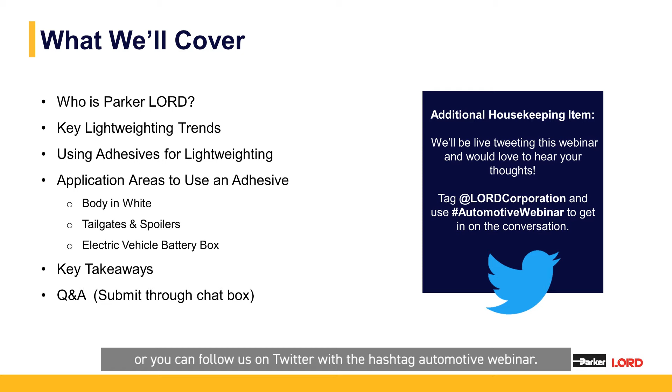Parker is a global company with more than 100 years of history. We started in 1917 from a small office in Cleveland, and now we are serving more than 50 countries around the world with more than 3,000 product lines and very close to 500,000 customers.

Our main target is really to be a collaborative partner that can deliver a solution to meet the specific design with a specific cost target with the continual improvement process. And obviously, we are able to support our customers around the globe in each location. In fact, as EPS division, we have offices, plants and support in the main regions close to our customers, and we can provide the same product with the same quality, with the same performance around the globe.

Let's start looking at the CO2 emission targets around the globe. As we can see, the emission target level is different for each region. But what is equal is the trend. The trend is to reduce it. And it's clear that in 10 years from now, the reduction will be very, very strong. And this is an important target for all of us because it can help us to preserve our future and to work on a more sustainable transportation system.

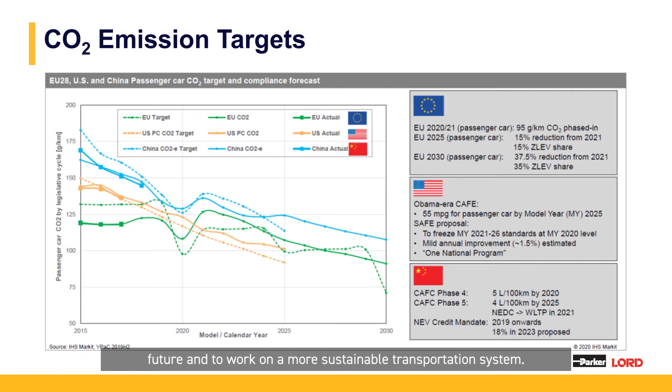If you analyze the situation in more detail, it's evident that lightweighting is one of the key elements that can help CO2 emission reduction. Just for example, for each kilogram that we can save in the car, we can reduce the CO2 emission by 0.08 grams. However, if we consider the weight increase that we can have on EV cars, lightweighting will become more and more important for two main reasons: to improve the fuel economy and to increase the battery autonomy.

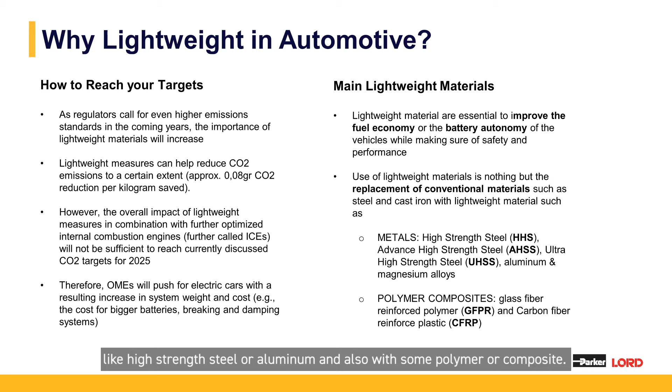And because of that, the adhesive is one of the key elements in this environment. In fact, we will change the standard material with new materials like high strength steel or aluminum, and also with some polymers or composites. And because of that, the adhesive will become one of the key elements.

In fact, if we look in a snapshot at how the trend will be during the next 20 years, we see that the usage of lightweight material will move from 29% to 67%. And we are not talking only about high strength steel or aluminum, but also carbon fiber plastics.

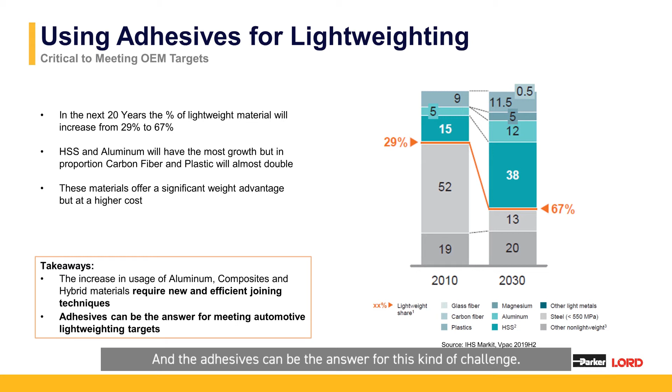And all of that provides new challenges on the market. And the challenge is more related to defining efficient joining techniques, and also providing cost savings in order to compensate for the more expensive material that there is on the market. And the adhesives can be the answer for this kind of challenge.

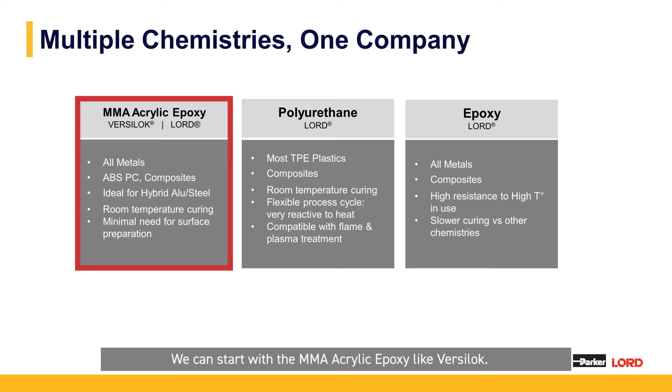Since we are talking about different substrates, we must work with different chemistries, and Parker can provide all of them. We can start with the MMA acrylics epoxy like Versilok, that is very flexible and perfect for hybrid bonding like aluminum steel, with a great room temperature curing profile.

Or we can work with polyurethane adhesive that is very optimized for composite material and with strong compatibility with flame plasma treatment. Or we can talk about epoxy material that is perfect when we want to work in high temperature environments and more strong or severe

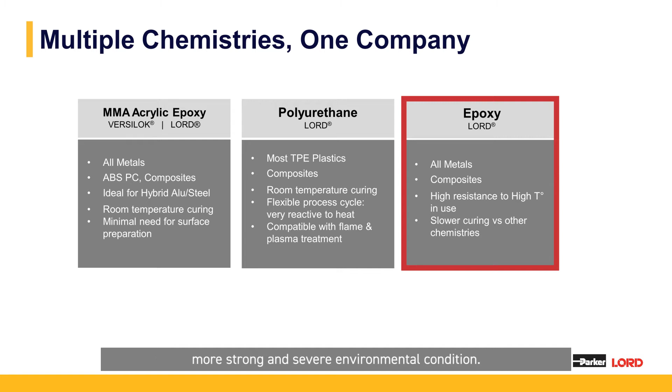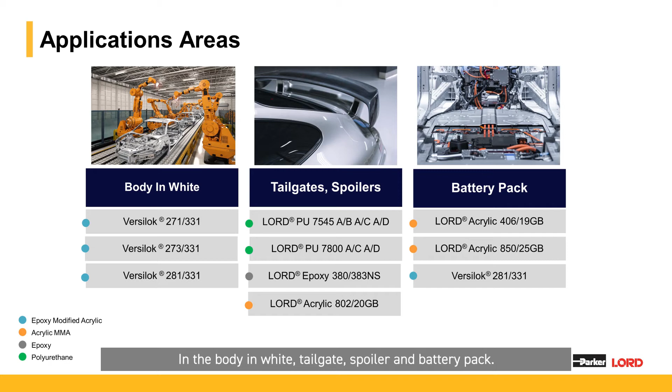environmental conditions. In terms of application, we would like to share with you some specific cases that we have analyzed in the body in white, tailgate spoiler and battery pack.

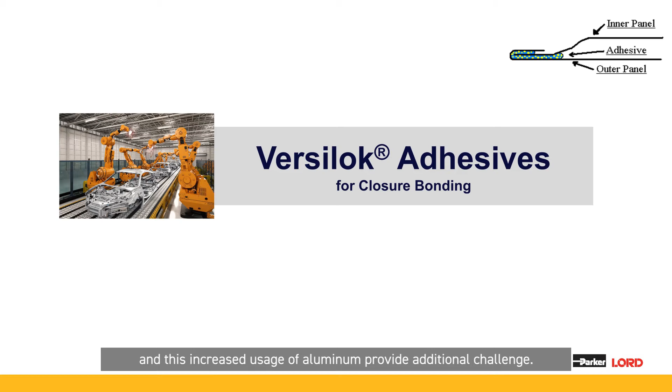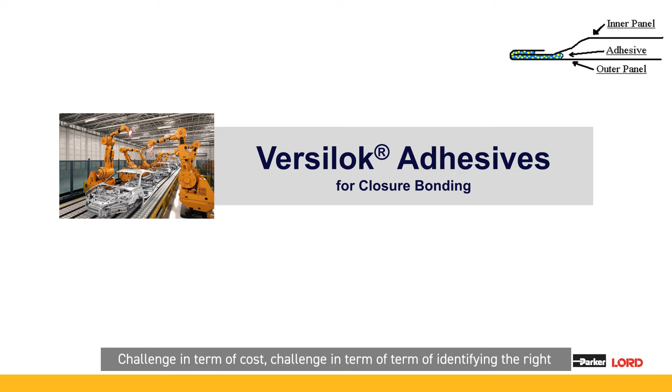Let's start with the closure and the specific hem adhesive that is used in this application. Here we have noted that the usage of aluminum is increasing day by day, and this increased usage of aluminum provides additional challenges: challenges in terms of cost and in terms of identifying the right quality of the surface of the hood, the lift gate or the door. Versilok adhesive is one of the right answers to all of these challenges.

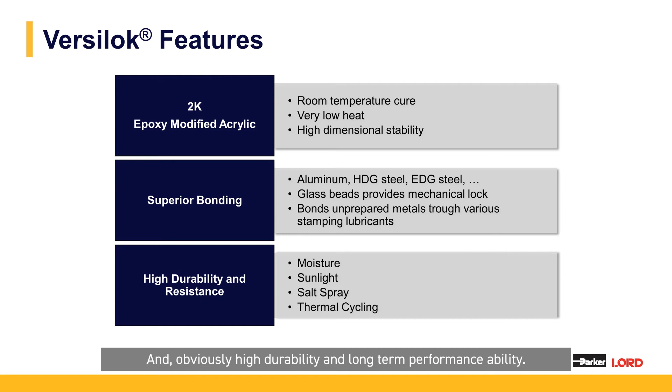Versilok is a 2K adhesive, an epoxy-modified acrylic that has a specific room temperature curing profile that provides the right dimensional stability, together with high performance in terms of bonding on all the substrates available, including the stamping lubricants that are possible to use in the market. And obviously with high durability and long-term performance stability. If we go into more specific characteristics of Versilok, my colleague Jeff can speak in more detail on that.

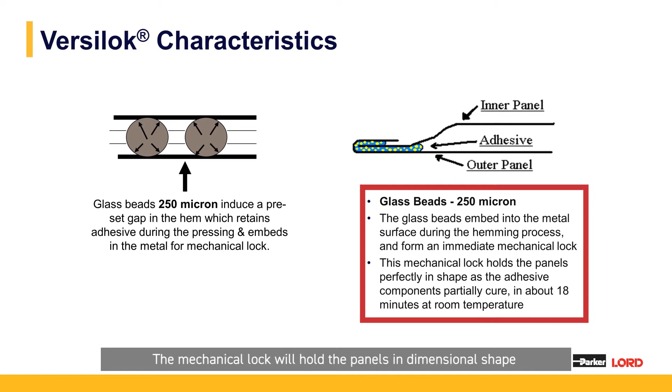Thank you, Matteo. The main Versilok characteristic incorporated within the adhesive itself is the 1/4 millimeter diameter glass beads that help reduce movement of the panels when they are finished hemming. The glass beads are able to be embedded into the metal surface and form an immediate mechanical lock. The mechanical lock will hold the panels in dimensional shape, and you have approximately 18 minutes to accomplish this.

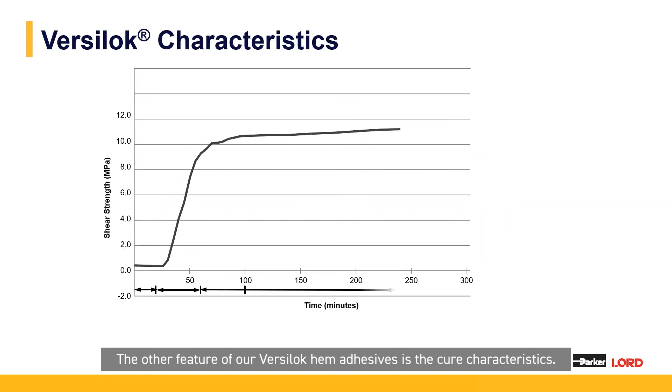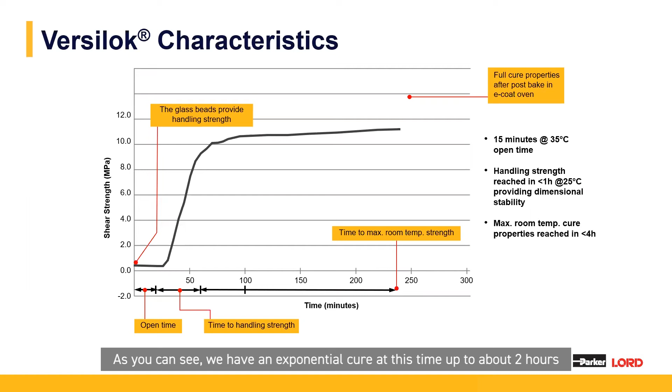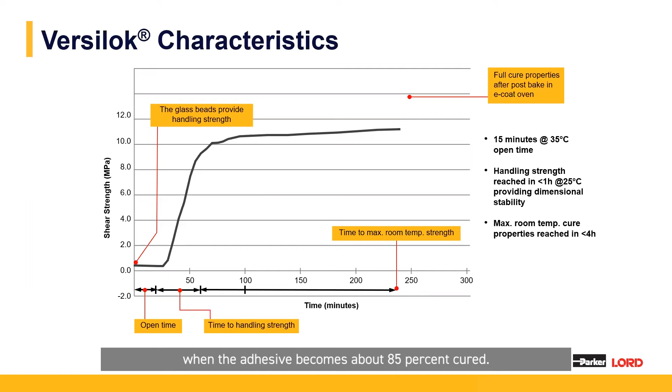The other feature of our Versilok hem adhesives is the cure characteristics. As you can see on this slide, we have adequate open time of approximately 15 minutes at room temperature, and approximately 60 minutes handling strength time. As you can see, we have an exponential cure up to about 2 hours, when the adhesive becomes about 85% cured. After that, it's able to go into the E-coat oven.

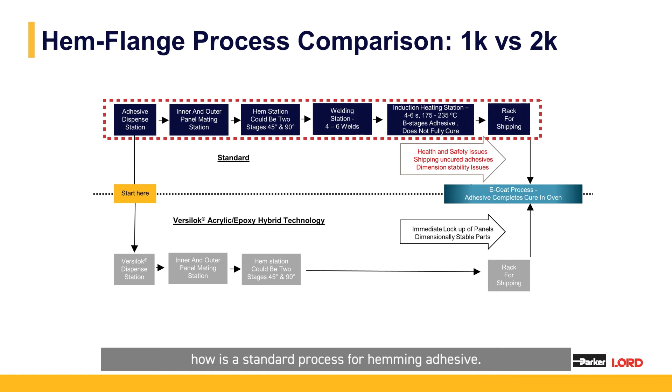Yes, thanks, Jeff, for this introduction on the key technical characteristics of Versilok. All of these characteristics can help us optimize the hem adhesive process. Looking at the top part of the slide, in a standard hemming adhesive process we have the dispensing station, the marriage of the inner and outer part, the hemming station, then the welding and the heating station. Both stations are needed to lock the dimension and provide the right stability of the part. After that, the hood, the door or the lift gate is ready to be shipped or put on the rack.

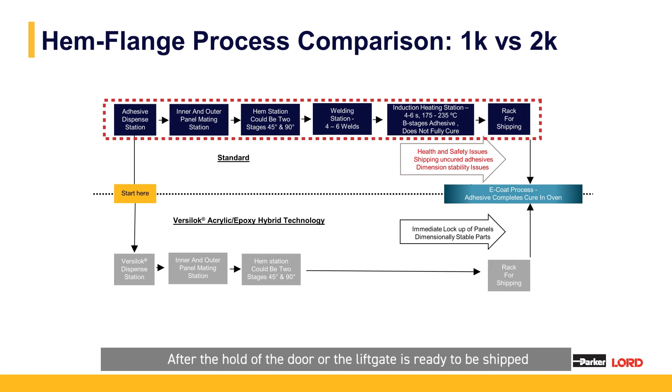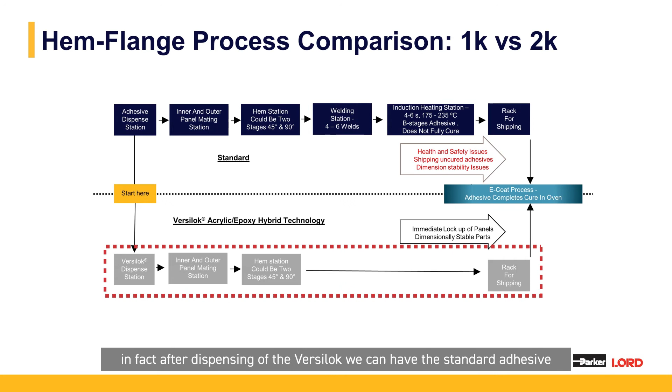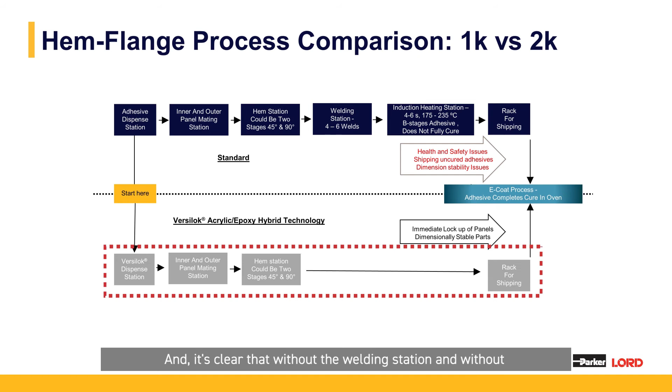With Versilok, we are able to change the process completely and save 2 stations. After dispensing Versilok, we have, as for the standard adhesive, the inner and outer marriage, and then the hemming station. And immediately, the part can be put on the rack. Without the welding station and without the heating station, we can provide clear savings in terms of capex and in terms of process timing. That is one of the benefits Versilok provides.

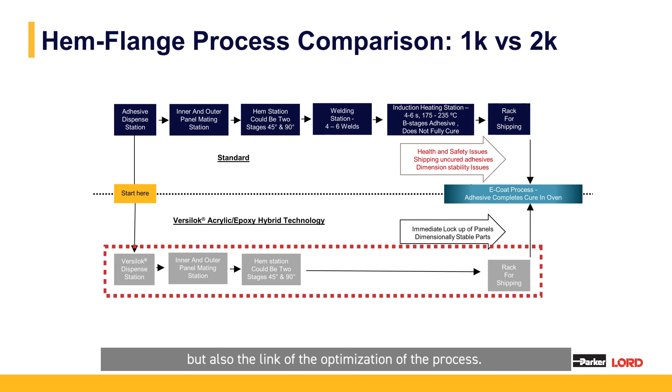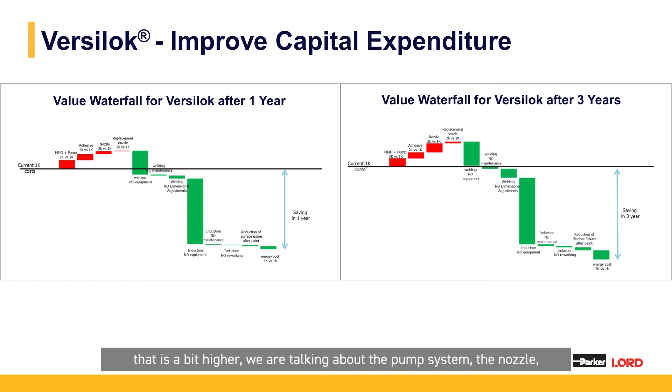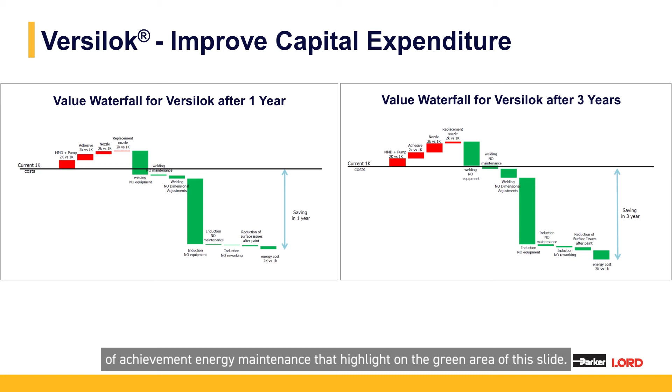That is not only linked to the quality of the surface, but also to the optimization of the process. Going into more detail about the capital saving using Versilok, as you can see on both slides, there is some additional cost needed to use the 2K system, the red area: the pump system, the nozzle. But the savings in terms of equipment, energy and maintenance, highlighted in the green area on the slide, are more and more evident. They are available immediately after the first year and keep growing over time. That is an example over 3 years.

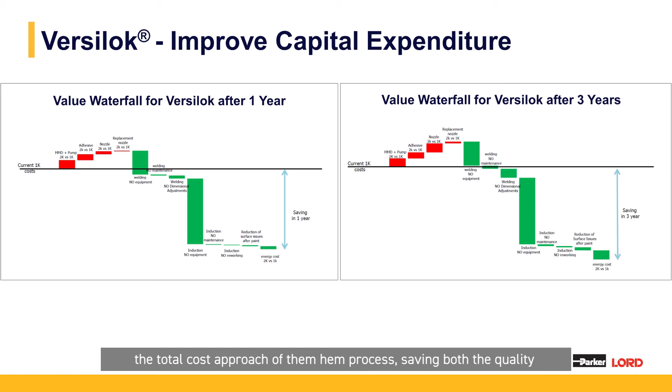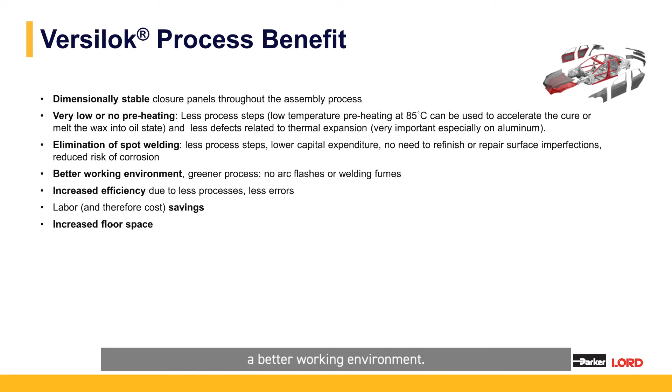So that is a sustainable way to think differently about the total cost approach of the hemming process, saving on both quality and CapEx investment. We start with great dimensional stability that provides the right quality of the part. In terms of process we are working with very low or no pre-heating, so we can optimize the process. We are increasing manufacturing efficiency, saving in terms of labor and space, and providing a better working environment.

Let's now talk about a different type of application: the adhesive that can be used on tailgates and spoilers, which have some specific needs or characteristics. One of the issues this kind of application can have is read-through. That is an unpleasant visible distortion of the bond line caused by a wrong adhesive that puts stress on the part.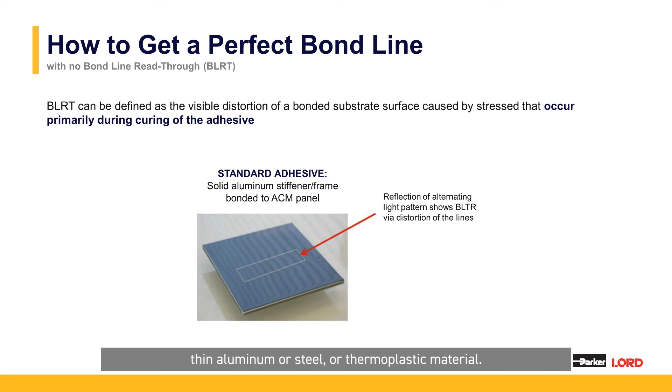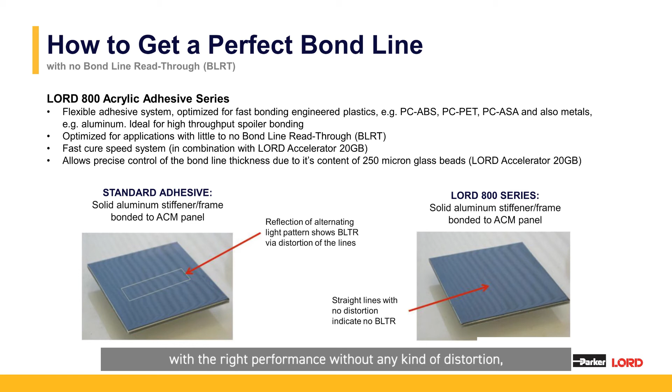And that kind of defect is very common when we are talking about thin aluminum or steel or thermoplastic material. Since this kind of substrate is used more and more in the market, we are working to define a specific type of Lord family adhesive that can support this kind of joint technique without any kind of visual distortion, so without any kind of read-through and with the right performance. So the focus of this product line is bonding the engineered plastics with the right performance without any kind of distortion, so without any kind of read-through.

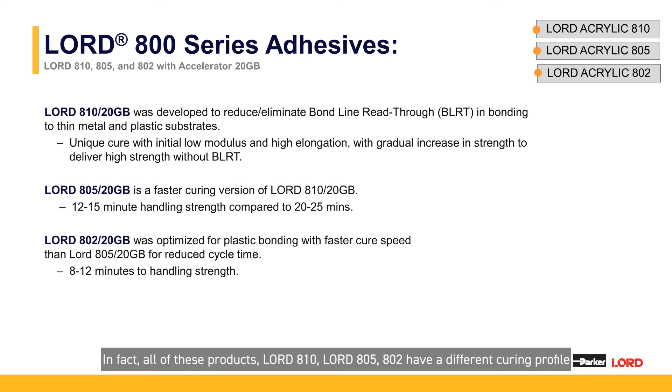And in order to do that, we designed 3 different products that have the main target to reduce the stress and deliver the bond without read-through, but to be flexible enough to meet all the manufacturing requirements. In fact, all of these products, Lord 810, Lord 805, 802, can have different curing profiles in order to meet all the manufacturing requirements.

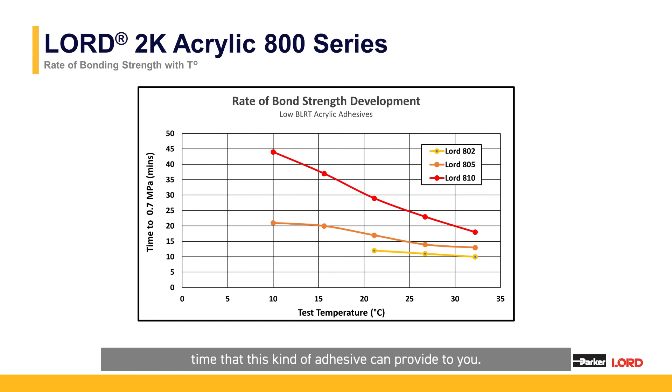And here there is a snapshot with more detail about the specific time needed to reach the handling strength at different temperatures, because this is one of the key elements to identify the right working time for each single application. And if you have a specific working temperature, we can work together to identify the specific time that this kind of adhesive can provide to you.

Here below, a great summary of the main characteristics of the Lord 800 series. It is a softer material that can improve the bonding performance and avoid any kind of read-through effect. It is a high elongation adhesive that can support the stress caused by the thermal expansion of the substrate. The curing profile delivers the right bonding strength at the right time in order to support the majority of the manufacturing process, and it is easy to use, and the mix ratio is optimized in order to reduce the shrinkage during the curing time.

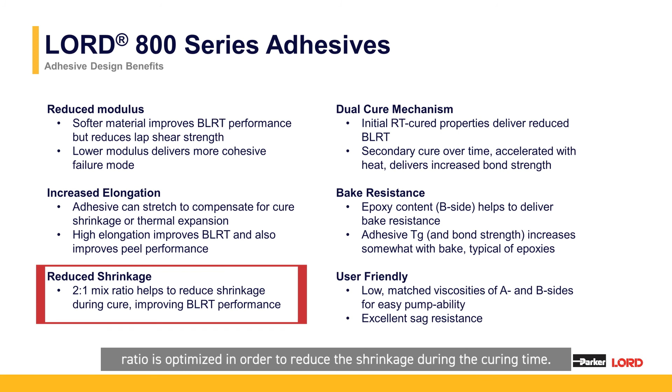Let's now discover a new area, the battery box. In this area, there is another example of a challenge that the adhesive can help to overcome, both in terms of performance, meaning providing the right mechanical stability and also thermal conductivity if needed, and the right efficiency in terms of manufacturing process, so no post welding and reworking, and providing the right flexibility in the process.

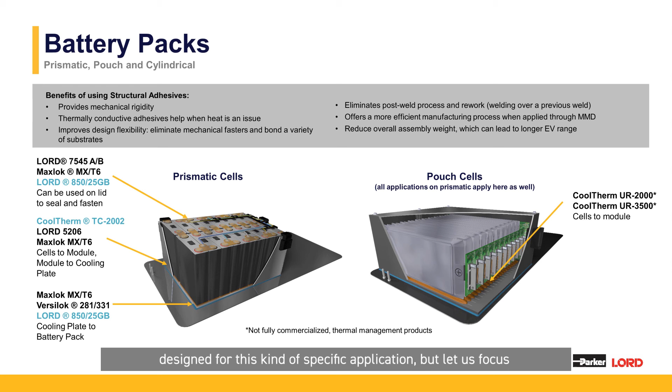Here you can have an overview of all the products that are designed for this kind of specific application, but let us focus more on two specific adhesives, Lord 850 and Lord 852. These are products that support a lot of our customers on battery design. In fact, they are able to bond a huge range of unprepared metals and composites, provide high performance in terms of durability, and a very wide range in terms of temperature resistance.

We are talking about batteries, so in this case, temperature is one of the key elements. And obviously, we have long-term performance in terms of resistance to solvents and UV exposure. And obviously, it's a non-sagging material, so we can really apply the material in any position to support all the process.

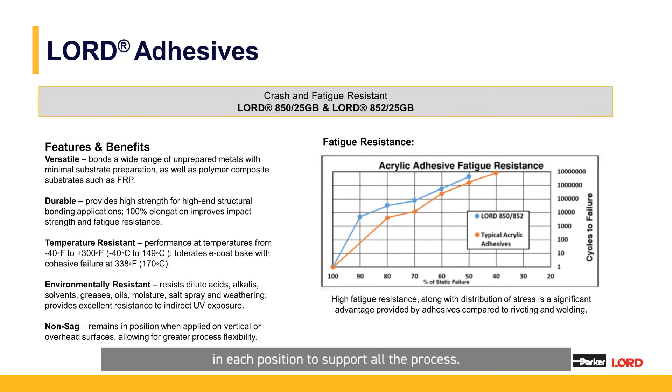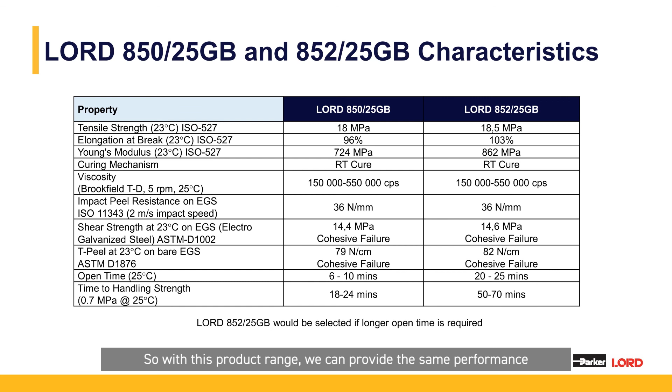If we look in more detail at the product characteristics, the two products are designed to meet the different types of process on the market. The Lord 850 is faster compared to Lord 852, but the performance of both is quite similar. So with this product range, we can provide the same performance to different manufacturing processes.

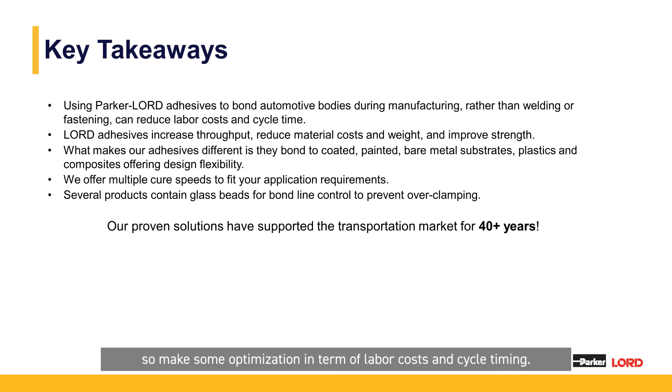In terms of some takeaways from our presentation, using our Parker Lord adhesives, we can bond different types of metal substrate and avoid unnecessary processes like welding or fastening or preheating, so optimizing labor cost and cycle time. We can increase the performance in terms of visual aspect on each surface, and we can offer different curing speeds in order to fit different types of application.

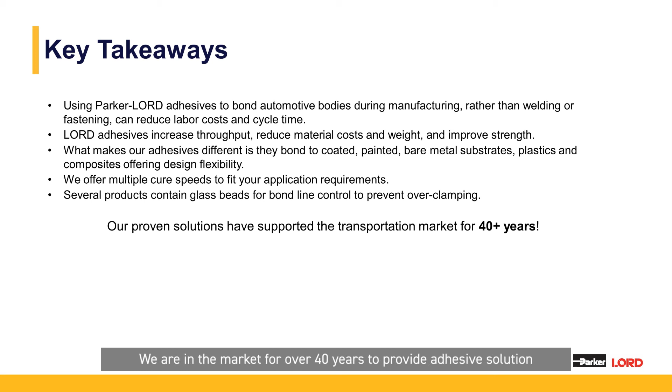And several of these products contain glass beads, and this is a great benefit to provide immediate bond line control to prevent overclamping. We have been in the market for over 40 years providing adhesive solutions, and we are the best partner for your lightweight strategy.